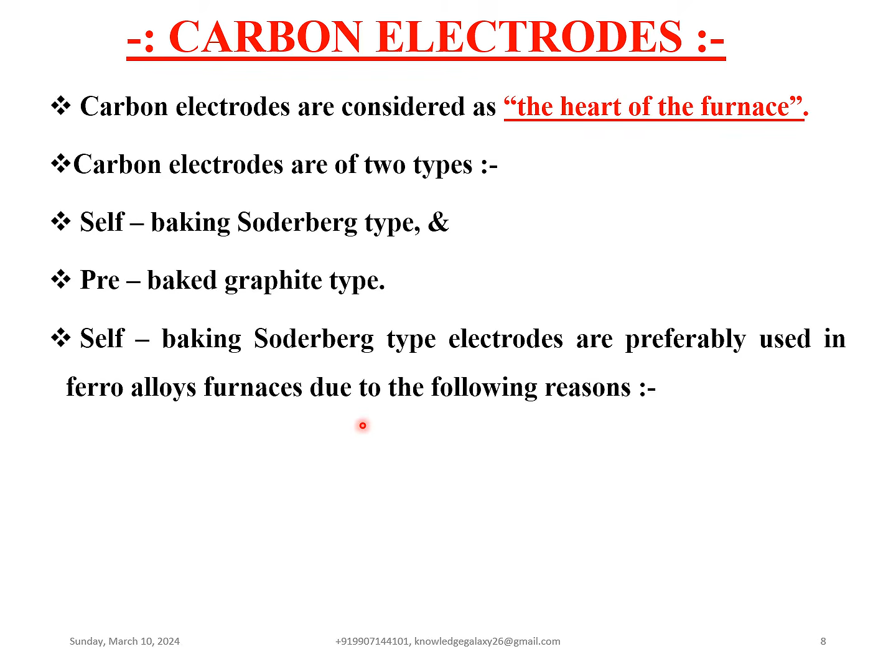Self-baking Soderberg type electrodes are preferably used in ferroalloys furnaces due to the following reasons. First, cost of production of self-baking Soderberg type electrodes is less as compared to pre-baked graphite type, because there is no need to consume time, energy and money for its manufacture. I hope you might have heard about this long ago and many times. But why the electrodes of Soderberg type are majorly used in ferroalloys production is the main question, the details of which I am going to describe in this presentation.

This presentation will clear all your doubts regarding carbon electrodes, its manufacture, its properties. So I will try to clear all your doubts with this presentation, and I hope this video will be very much helpful for you to know about the electrodes for submerged arc furnaces. Okay, let's proceed.

The electrode paste is fed in the mild steel casings in the size range of 25 to 75 mm briquettes or 50 kg cylinders. It gets baked by the heat of the process itself and forms the electrode, thereby eliminating the need for separate baking. This is why it is called self-baking Soderberg type electrode.

Operationally also, it is very convenient to use, since self-baking Soderberg type electrodes are continuously fed from the top based on the consumption, without any need to switch off the furnace for feeding the electrode paste in the mild steel casings. So all these reasons justify the use of self-baking Soderberg type electrodes in submerged arc furnaces. I hope it is clear to you all. Okay, now let's proceed.

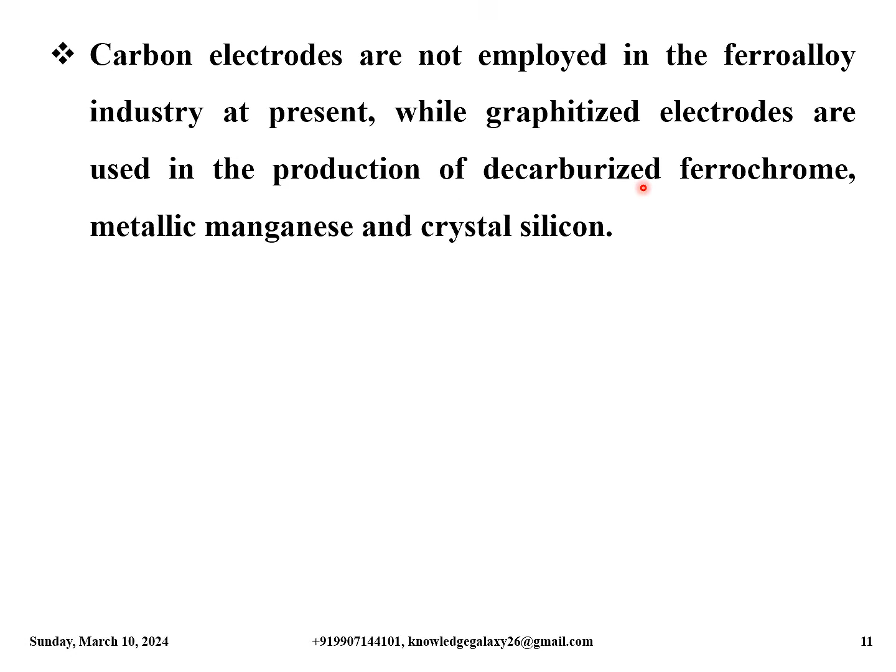Continuous self-baking electrodes, that is Soderberg electrodes, which have supplanted carbon electrodes wherever carburization of alloys or their dilution by iron is permissible, are widely used at present. Carbon electrodes are not employed in the ferroalloy industry at present, while graphitized electrodes are used in the production of decarburized ferrochrome, metallic manganese and crystal silicon.

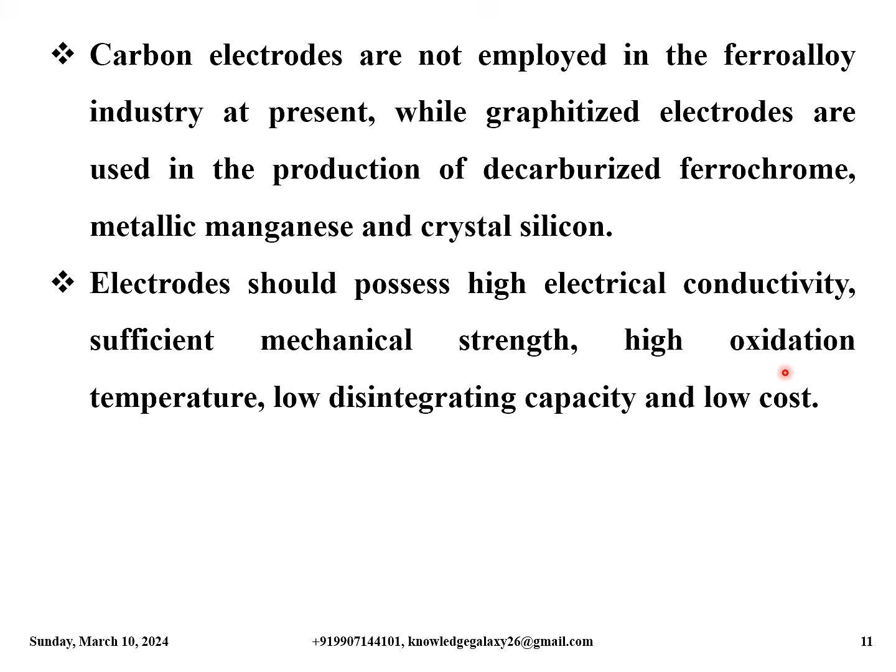Electrodes should possess high electrical conductivity, sufficient mechanical strength, high oxidation temperature, low disintegrating capacity and low cost. These are the major parameters to choose or major properties of a self-baking Soderberg type electrode. Round electrodes are generally used to ensure a reliable contact between the electrode and the clamp. The shape of the electrode should be geometrically perfect. Ferroalloy smelters normally use electrodes ranging from 250 to 1400 mm in diameter.

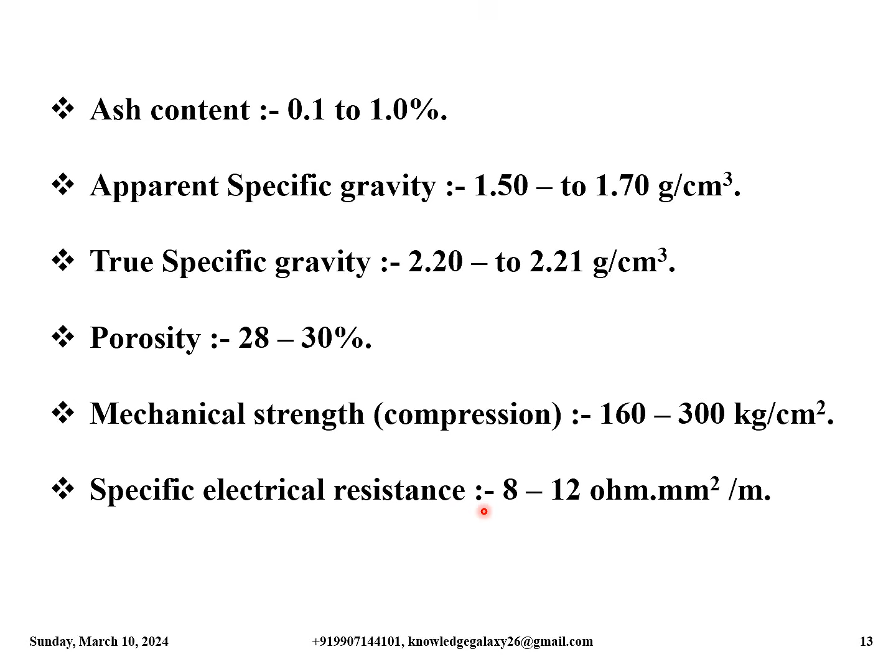The physico-chemical properties of graphitized electrodes are as follows. First, ash content 0.1 to 1.0%. Next, apparent specific gravity 1.50 to 1.70 gram per cubic centimeter. True specific gravity 2.20 to 2.21 gram per cubic centimeter. Porosity should be 28 to 30%. Mechanical strength in compression should be 160 to 300 kg per square centimeter. Specific electrical resistance should be 8 to 12 ohm millimeter square per meter.

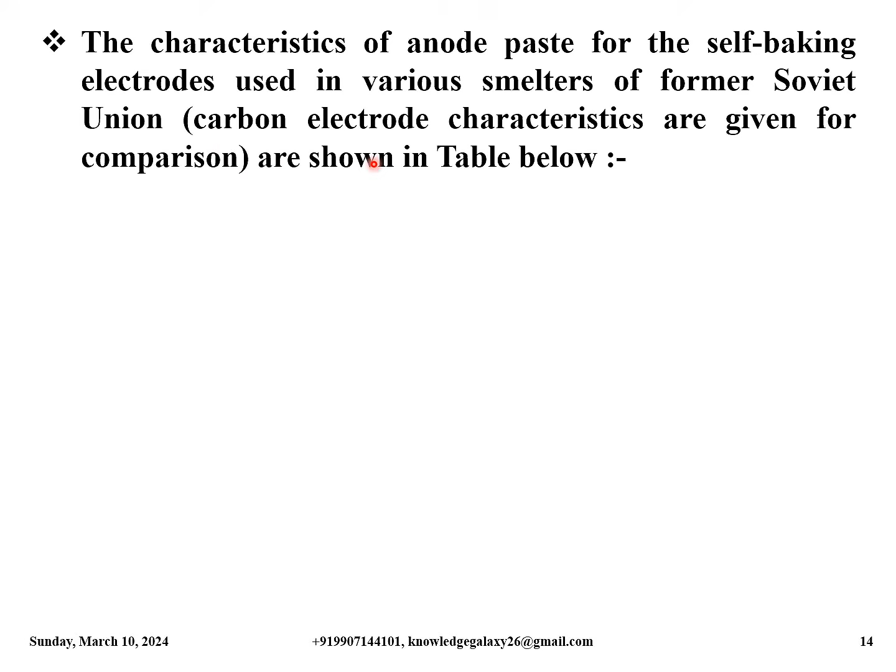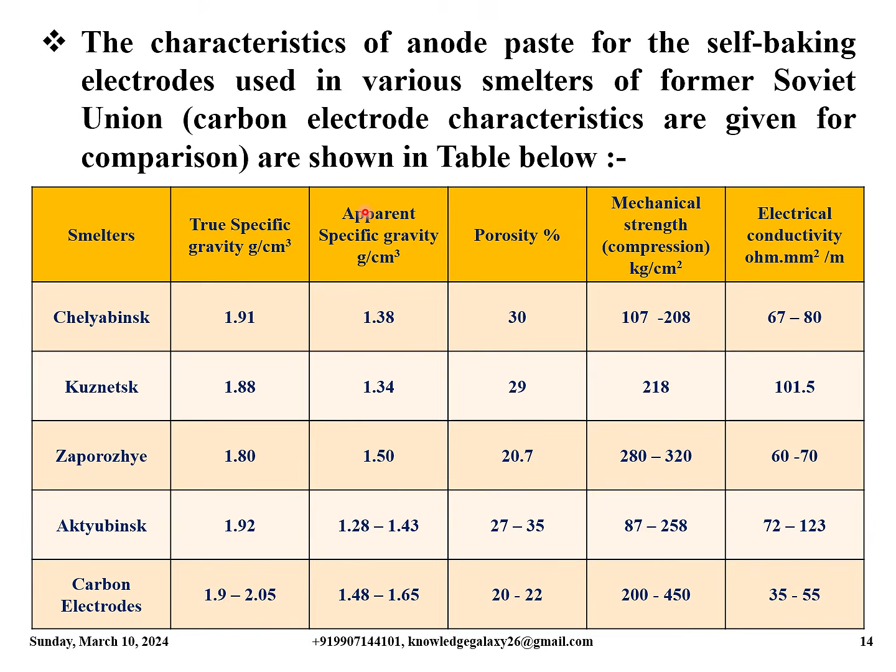The characteristics of anode paste for the self-baking electrodes used in various smelters of former Soviet Union are shown in the table below. Along with this, carbon electrode characteristics are also given for the comparison. My dear friends, I have populated this table so that it is very much useful for you all to understand the various properties about the electrode anode paste. You can pause the video and observe the table contents. Okay, let's proceed.

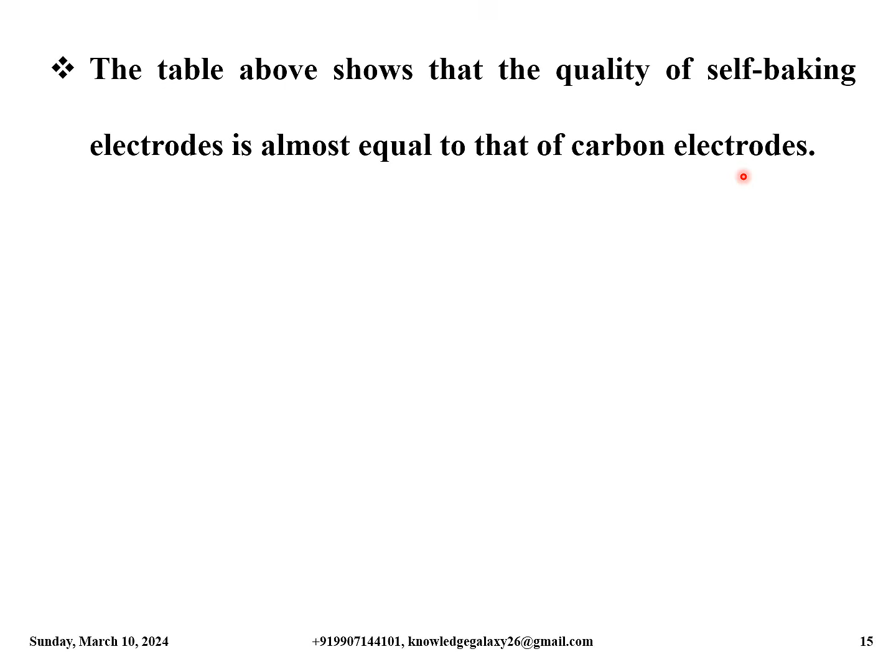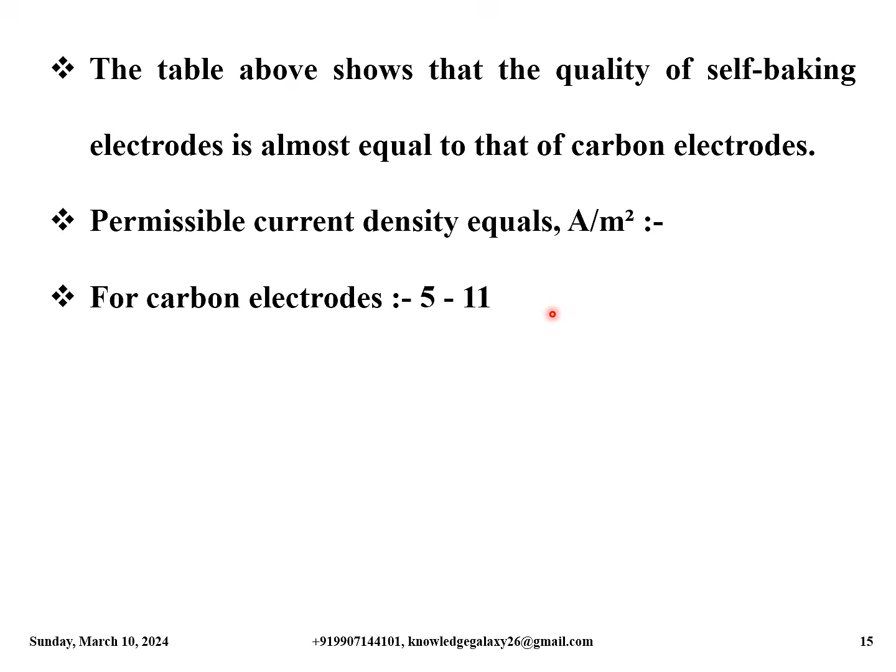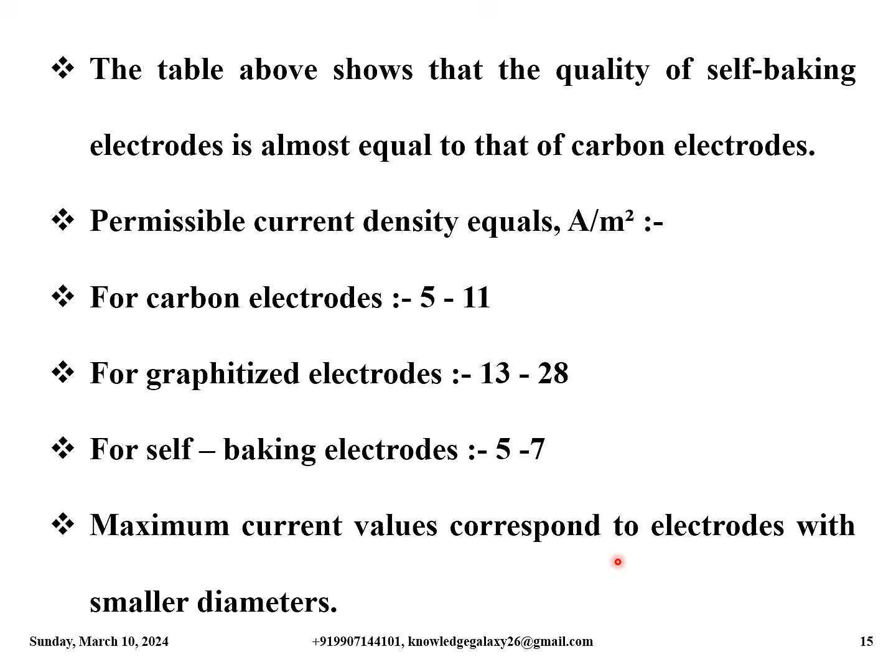The table above shows that the quality of self-baking electrodes is almost equal to that of carbon electrodes. Permissible current density, in amperes per square meter, for carbon electrodes is 5 to 11 amperes per square meter. For graphitized electrodes it is 13 to 28 amperes per square meter, and for self-baking electrodes it is 5 to 7 amperes per square meter. Maximum current values correspond to electrodes with smaller diameters.

So just keeping on. Electrode manufacture is characterized by numerous operations of considerable duration, which in the manufacture of graphitized electrodes take about 2 months. Carbonaceous materials used for the manufacture of electrodes, that is anthracite, coke, graphite and coal pitch, are stored in special, usually closed storerooms to prevent them from becoming damp and soiled.

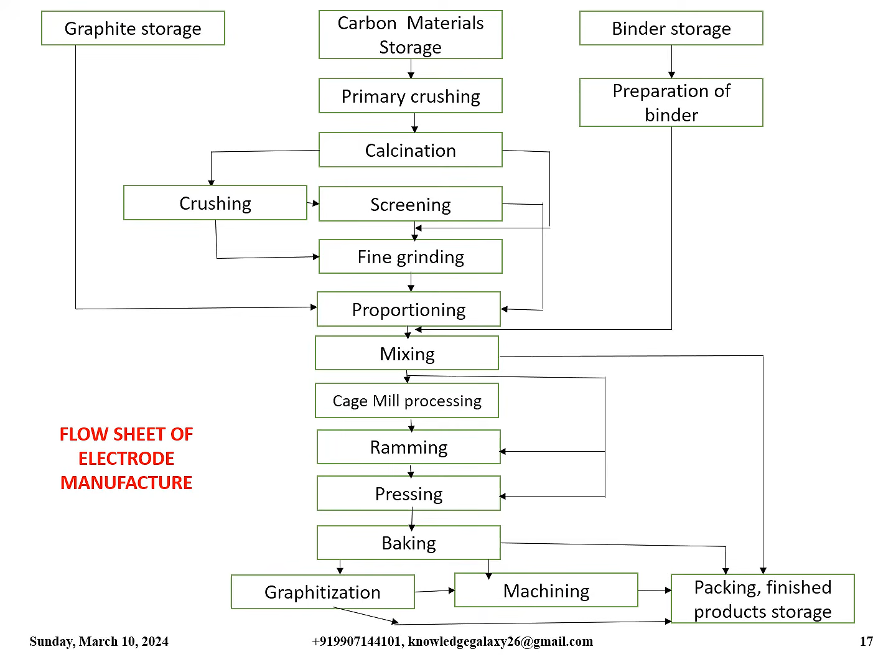My dear friends, I have made this flow sheet of electrode manufacture with too much effort, so I would request you all to please watch all the steps of this flow sheet of electrode manufacture very carefully. It will help you a lot. Okay, now let's proceed.

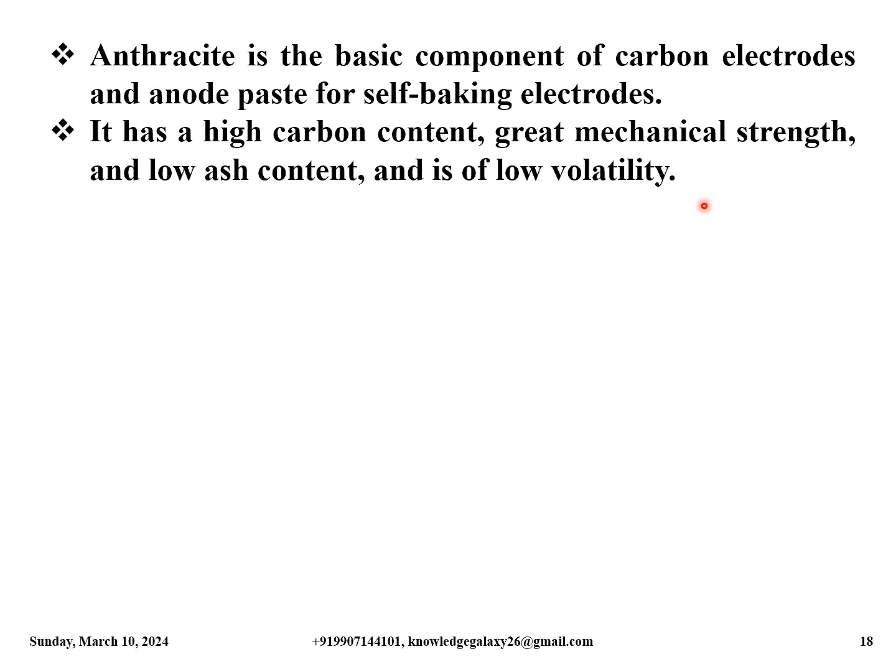Anthracite is the basic component of carbon electrodes and anode paste for self-baking electrodes. It has a high carbon content, great mechanical strength and low ash content and is of low volatility. Anthracite which has gone through thermal treatment in special furnaces is called thermoanthracite. The use of thermoanthracite in electrode manufacturing works makes it possible to substitute drying for calcination.

Anthracite is considered suitable for the manufacture of thermoanthracite, that is electrode and foundry grade, when it is strong and thermally stable, possesses high specific gravity, dense homogeneous structure, fine-grained fractures and is free of lamellar pieces and noticeable cleavage.

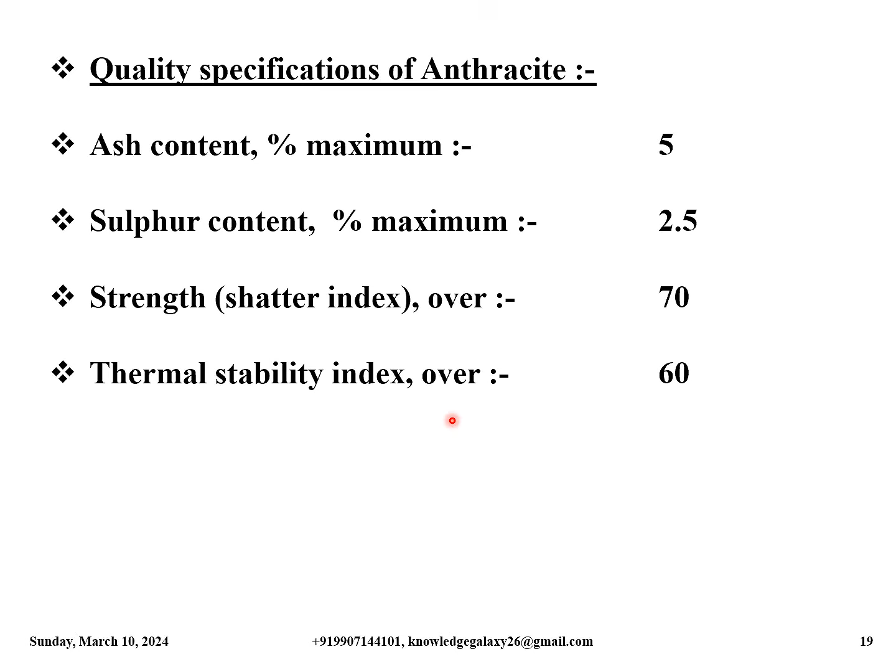Now let us discuss about the quality specifications of anthracite, which is used for the manufacture of anode paste. First, ash content, the maximum value should be 5%. Sulfur content maximum should be 2.5%. Strength, that is shatter index, should be over 70. Thermal stability index should be over 60. Specific gravity should be over 1.5. And size of lumps should be in the range of 50 to 120 mm. Fines, that is lumps of less than 50 mm, should be 5% or below.

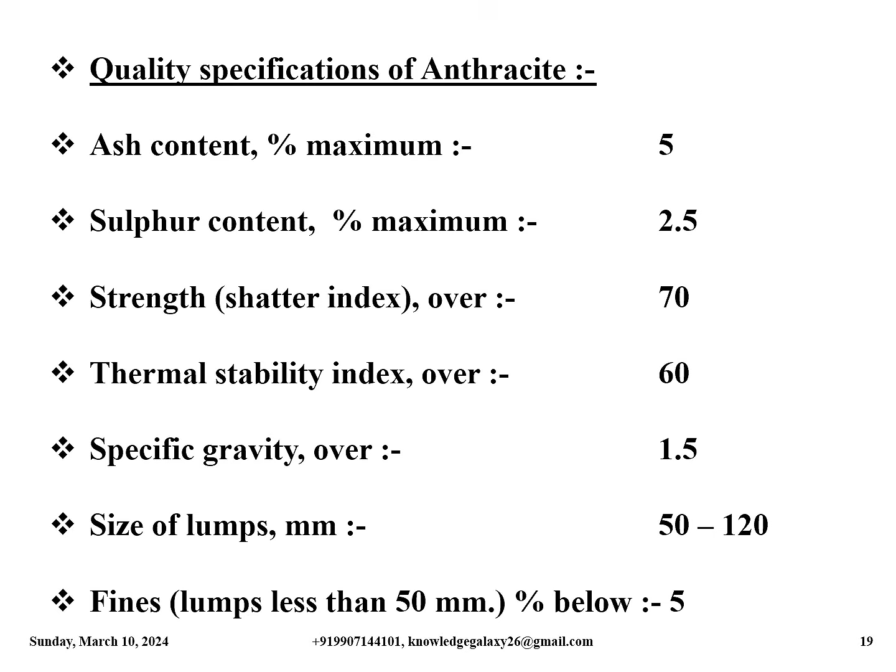Anthracite should not contain lumps of pyrite or barren rock. The quality specifications for the electrode thermoanthracites are as follows. First, moisture, the mean value should be 0.2%. Ash content, the maximum should be 5.0%.

Sulfur content, maximum should be 1.9%. Volatile matters content, maximum should be 0.3%. Lumps larger than 40 mm, that is Trommel test, should be minimum 70%. Specific electrical resistance, that is ohm square millimeter per meter, should be below 1.000.

Size of lumps in mm should be 25 to 100 mm. Fines content, lumps of less than 25 mm should be 5% or below.

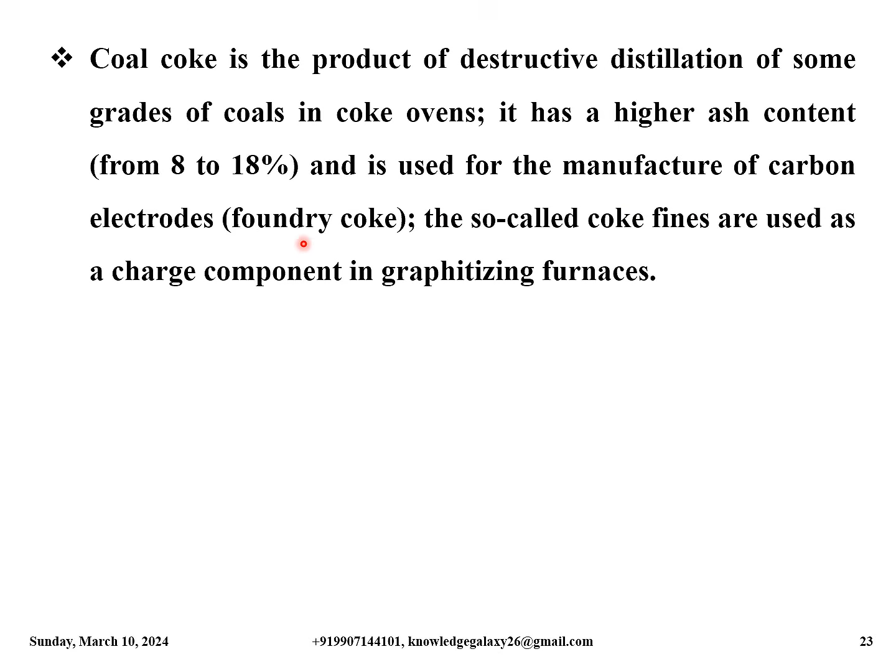Pitch coke is obtained by carbonizing coal pitch. Pitch and petroleum coke are distinguished by a low ash content below 1% and low volatile matter content. Coal coke is the product of destructive distillation of some grades of coals in coke ovens. It has a higher ash content, that is in the range of 8 to 18%, and is used for the manufacture of carbon electrodes, that is foundry coke. The so-called coke fines are used as a charge component in graphitizing furnaces.

Graphite, when added to the anode paste, enhances its plasticity, making pressing easier, thus permitting denser products to be obtained, and increases electrical conduction, thermal conductivity, and heat resistance. Ash in graphite should not exceed 10%. Coke characteristics are given in the table below.

Coal pitch is a solid, lustrous black in color. Its specific gravity ranges from 1.245 to 1.299. Coal pitch is used as a binder. Pitch is sometimes stocked in liquid form in specially heated hoppers called pitch conditioners. Another type of binder, that is coal tar, is stored in underground heated reservoirs in the binder store yards. This viscous liquid is a byproduct of coke.

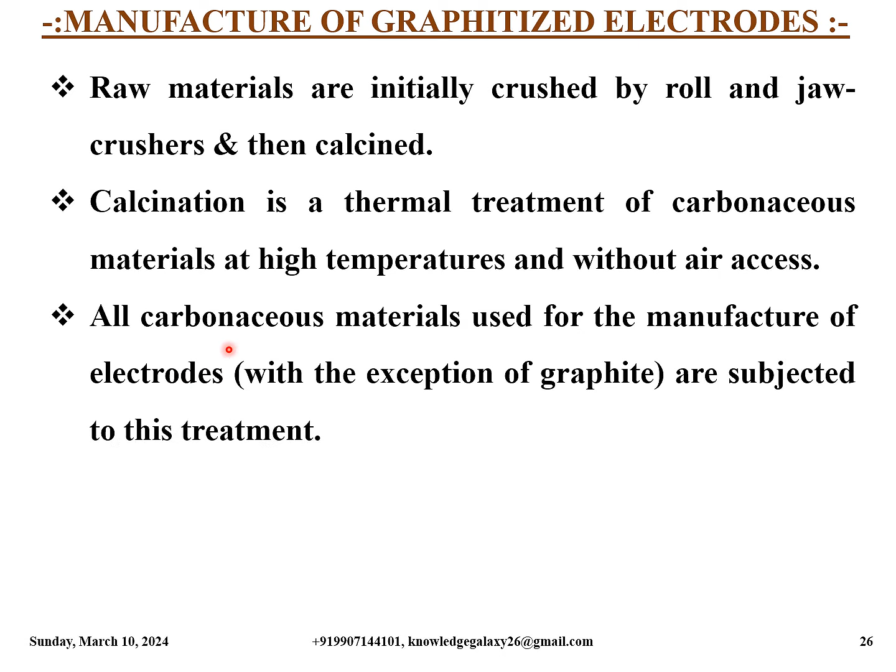Now let us consider the manufacture of graphitized electrodes. Raw materials are initially crushed by roll and jaw crushers, which are shown in the next slides, and then they are calcined. Calcination is a thermal treatment of carbonaceous materials at high temperatures and without air access. All carbonaceous materials used for the manufacture of electrodes, with the exception of graphite, are subjected to this treatment. This operation increases apparent and true specific gravities, electrical conductivity, and mechanical strength, and reduces the volatile matter content.

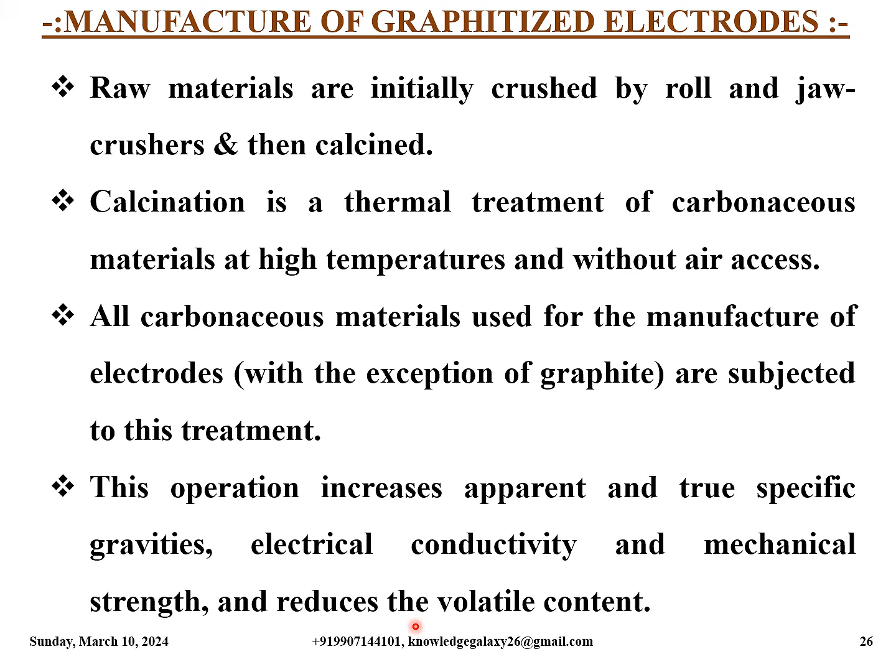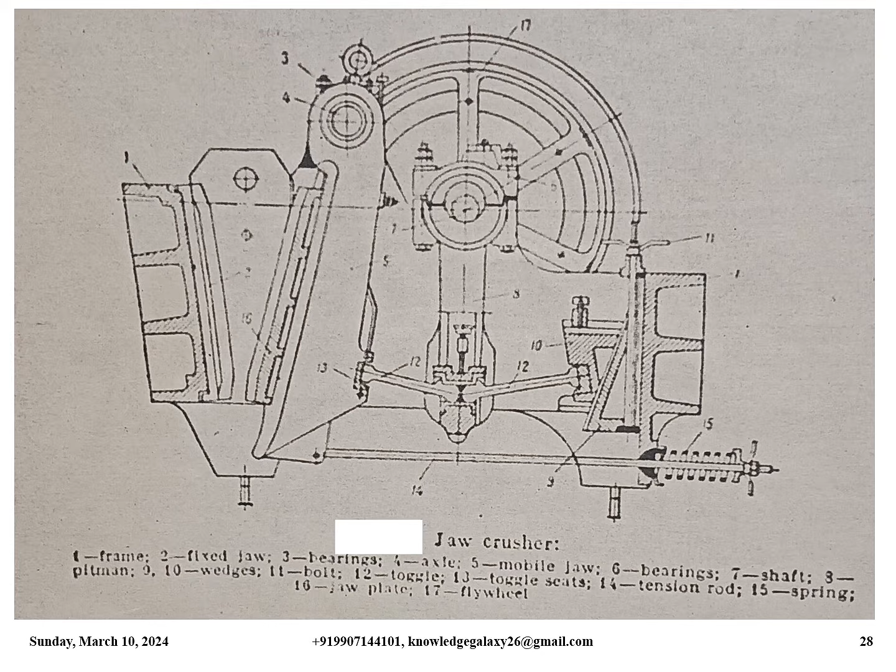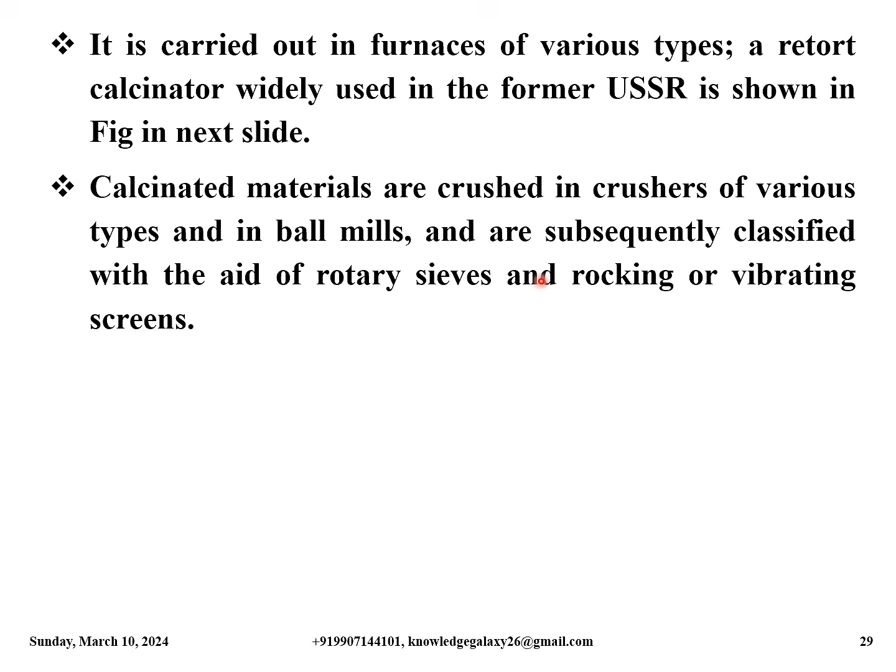Now, it is carried out in furnaces of various types. A retort calcinator widely used in the former USSR is shown in the figure in the next slide. Calcinated materials are crushed in crushers of various types and in ball mills, and are subsequently classified with the aid of rotary sieves and rocking or vibrating screens.

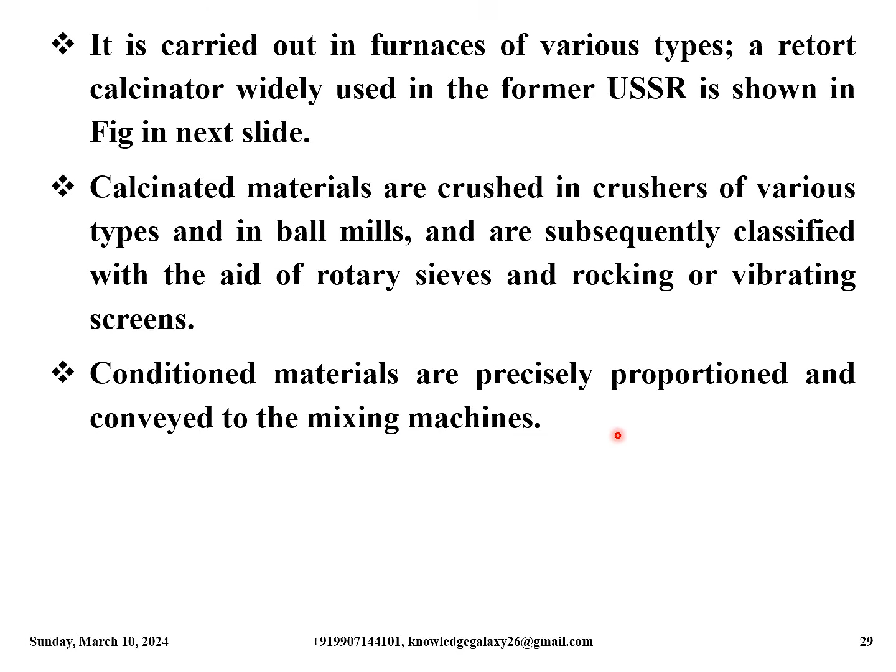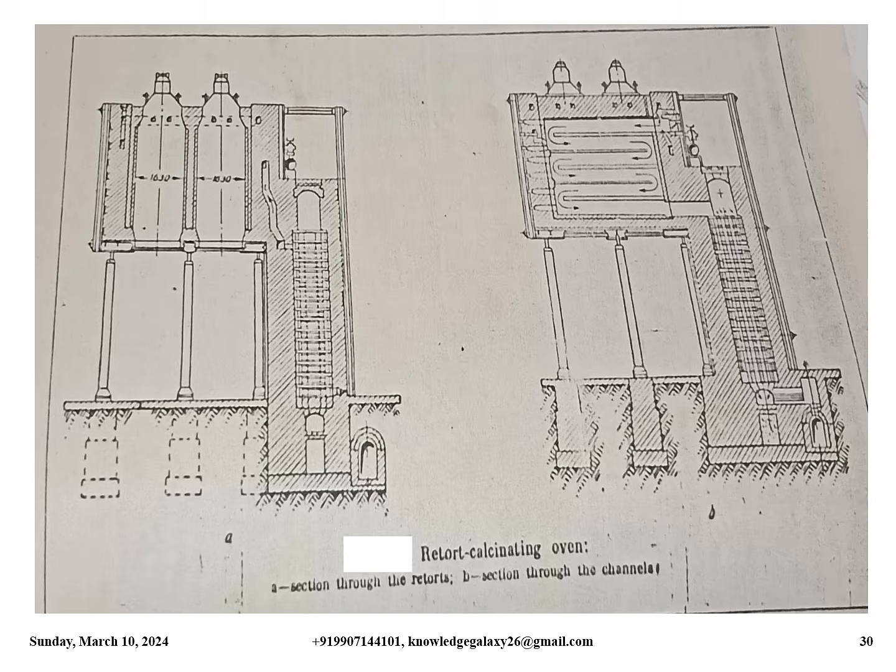Conditioned materials are precisely proportioned and conveyed to the mixing machines. A homogeneous mixture called electrode or anode paste is obtained in these machines. It goes either for the subsequent manufacture of electrodes or is considered to be a finished product. So this is the picture of the retort-calcinating oven used in the former USSR, and different sections are also mentioned in that.

The paste meant for the manufacture of electrodes is conveyed to a large mixing machine which acts as a conditioner and in which the temperature of the paste is leveled out. Anode paste products are obtained with the aid of hydraulic presses by two methods. First, pressing with closed impression dies, and second, extrusion of the paste through a nozzle, the broaching method. Preliminary pressing is usually done directly in the press container, which increases the compactness of the electrodes and levels out the pressure in the operation.

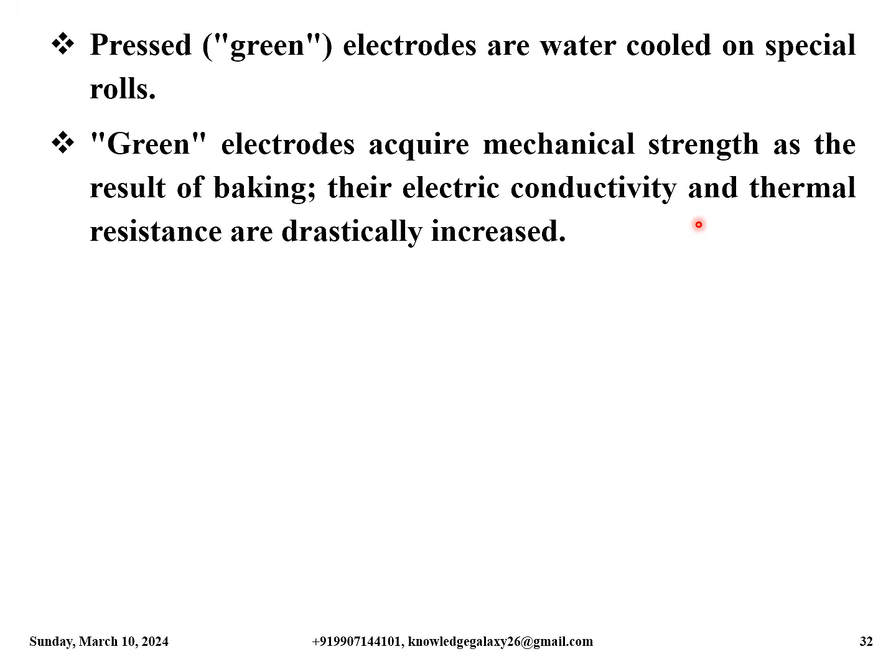Pressed, that is green electrodes, are water cooled on special rolls. Green electrodes acquire mechanical strength as the result of baking. Their electric conductivity and thermal resistance are drastically increased. Baking is effected at 1200 degrees Celsius in neutral atmosphere, which preserves the electrodes from being burned and deformed. Coke fines are used as a filling.

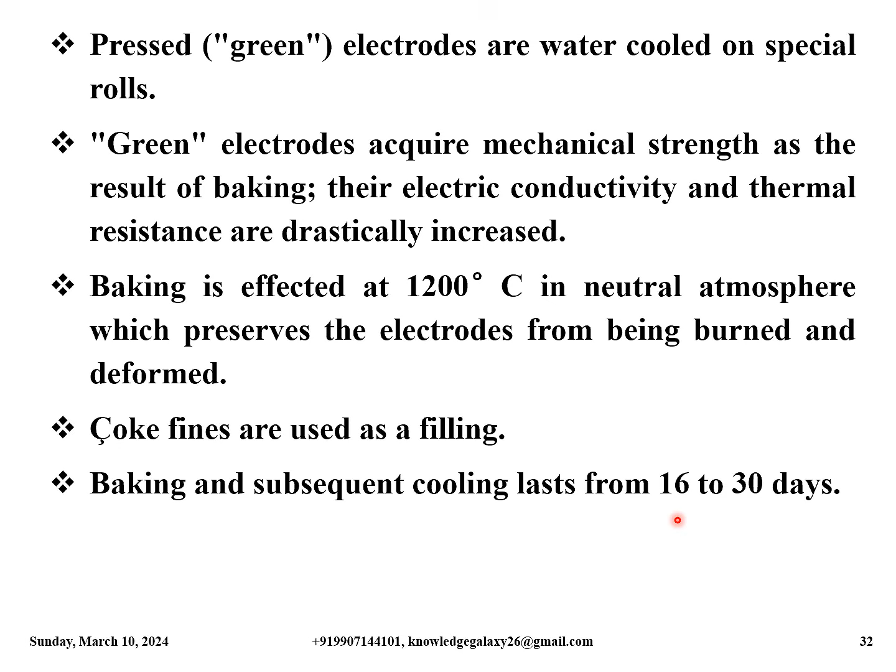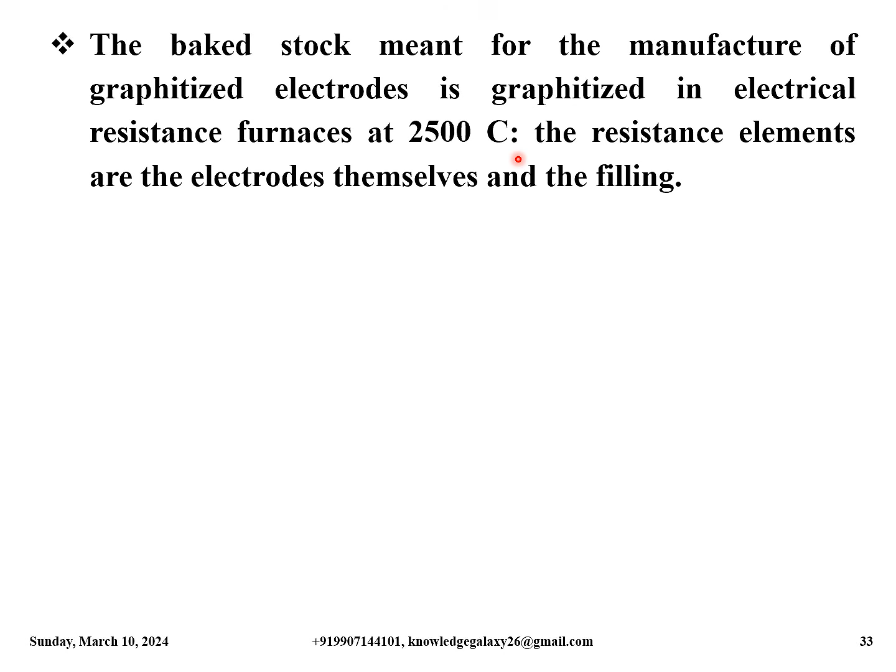Baking and subsequent cooling lasts from 16 to 30 days. As you can see, this is a very time-consuming process step, so it requires a lot of effort. During this period, the binding materials are cooked and the electrodes acquire the properties mentioned above. The baked stock meant for the manufacture of graphitized electrodes is graphitized in electrical resistance furnaces at 2500 degrees Celsius. The resistance elements are the electrodes themselves and the filling.

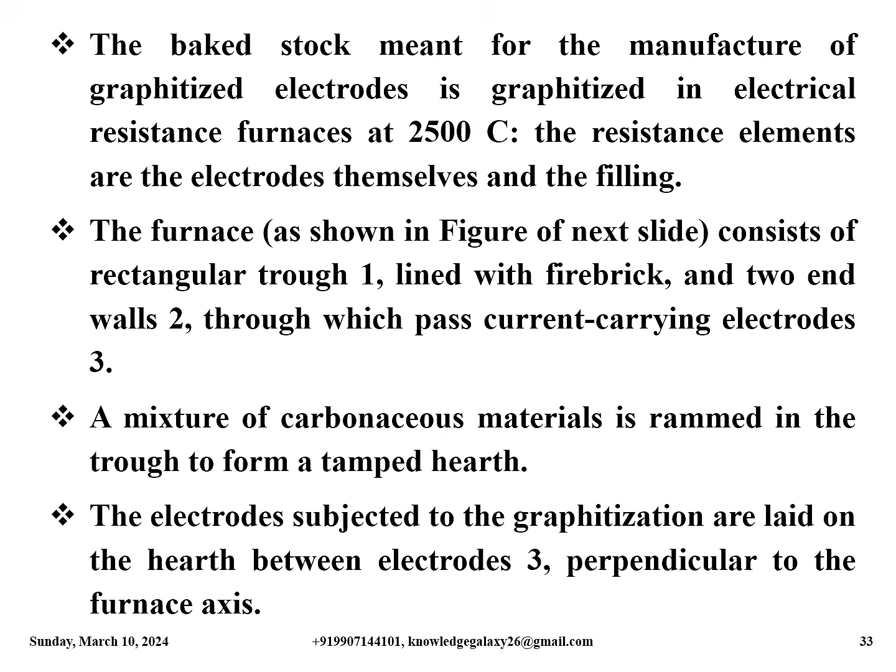One side wall is made of firebrick while the other is of concrete blocks. The space between the electrode charge and the side walls is filled with heat insulating material. A layer of insulating material also covers the electrodes. As the result of graphitization, the products acquire valuable graphite properties: sharp increase in electrical conductivity, heat conductivity and chemical stability, and diminution of hardness. The electrodes are readily machined, this ensuring the accuracy of nipple joints.

An additional operation, that is soaking, is effected to improve the physico-chemical properties of graphitized nipples and to increase their compactness and toughness. Baked stock is soaked with pitch in autoclaves at 200 to 300 degrees Celsius and 5 kg per square centimeter pressure for several hours depending on the cross-section area of the semi-product. After that, the latter is graphitized.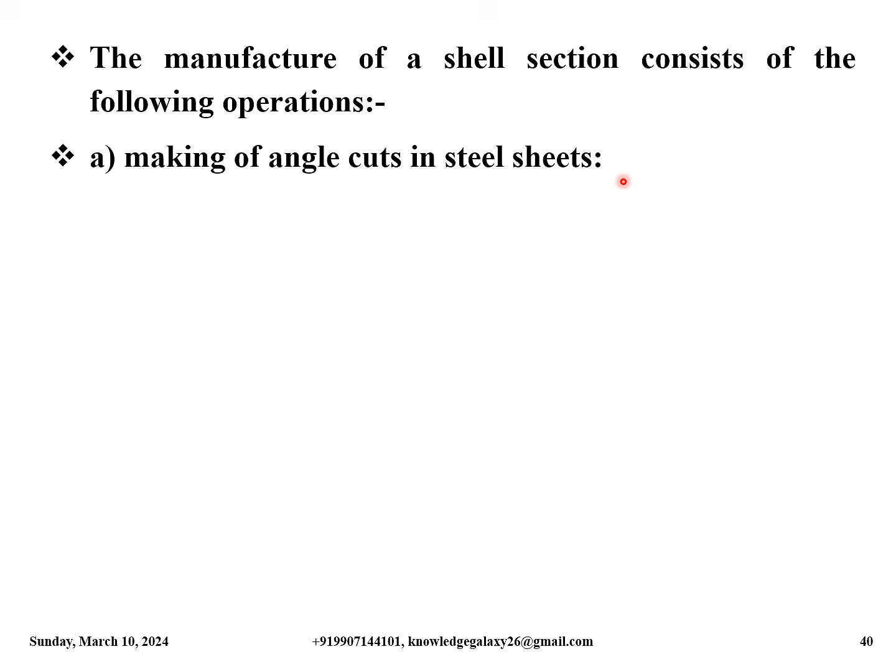The manufacture of a shell section consists of the following operations. Making of angle cuts in steel sheets, this is the first operation. Second, rolling of sheets along the cylinder generatrix, bending of sheet edges inside along the cylinder radius and bending of

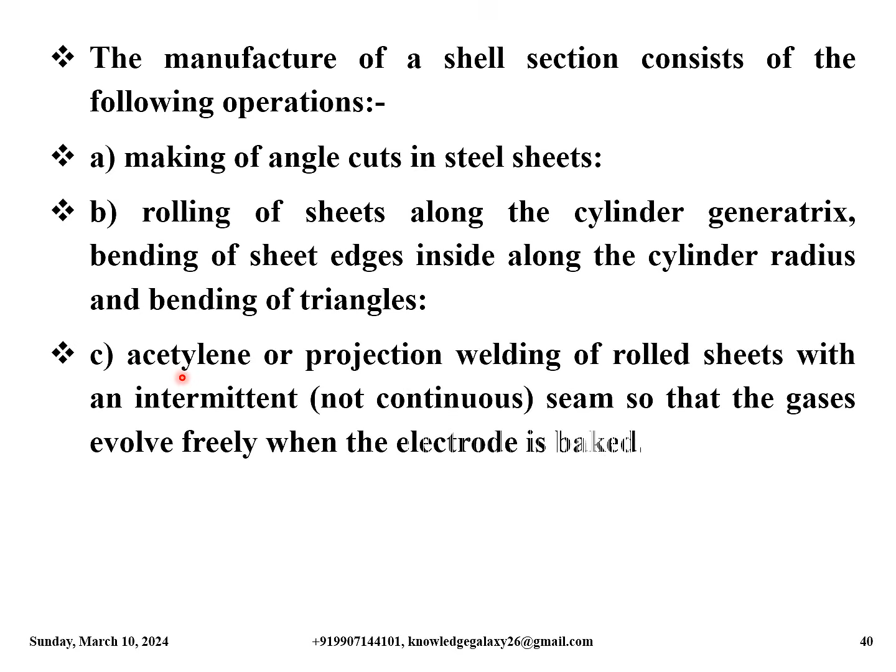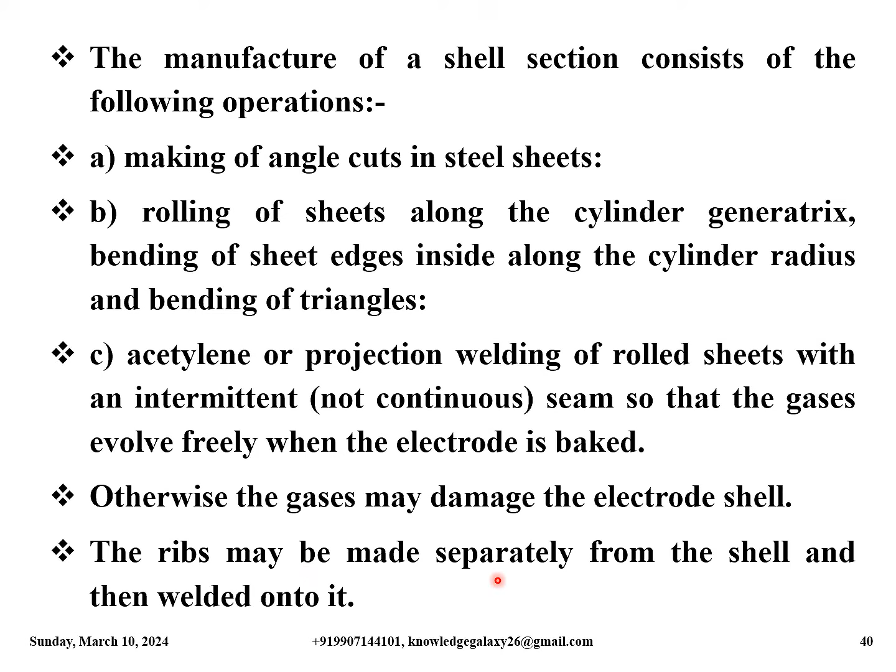triangles. Third step is acetylene or projection welding of rolled sheets with an intermittent, that is not continuous, seam so that the gases evolve freely when the electrode is baked. Otherwise, the gases may damage the electrode shell. The ribs may be made separately from the shell and then welded onto it.

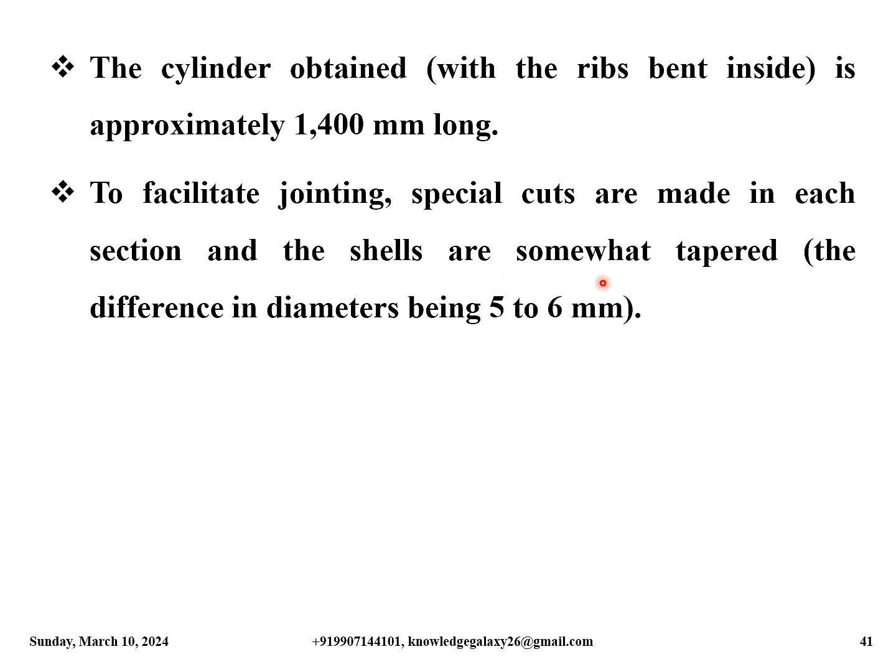The cylinder obtained with the ribs bent inside is approximately 1400 mm long. To facilitate jointing, special cuts are made in each section and the shells are somewhat tapered, that is the difference in diameters being 5 to 6 mm only.

Inner ribs are intended to increase contact surface between the shell and the anode paste to provide adequate adhesion and to make the electrical conductivity and mechanical strength of the electrode more reliable. The number of ribs ranges from 4 to 8 depending on the electrode diameter. The rib height is increased correspondingly from 100 to 250 mm.

There are not less than 4 triangles bent on each rib, the so-called tongs. These tongs strengthen adhesion between the shell and the anode paste. The shell itself is a casing for the anode paste.

It protects the anode paste against oxidation, provides passage for the electric current from the electrode arm to the baked section of the electrode and intensifies heat transfer to the upper unbaked section of the electrode.

Electrode paste is prepared in accordance with the above mentioned technological flow sheet in electrode manufacturing works or in special shops at the ferroalloy smelters. The various manufacturing methods give the following ratio of electrode paste consumption in percentage.

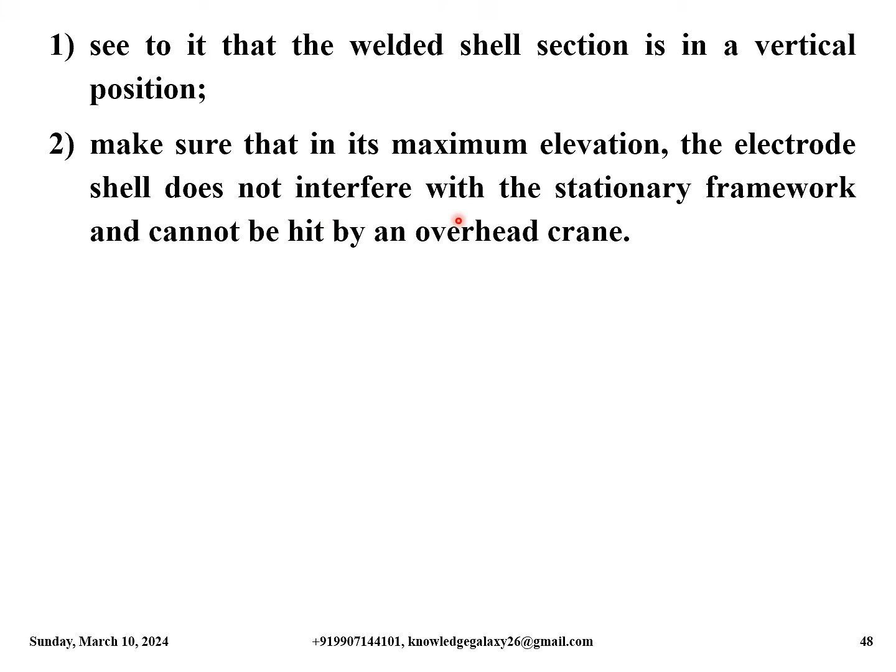In welding shells, one must observe the following conditions. First, see to it that the welded shell section is in a vertical position. Make sure that in its maximum elevation, the electrode shell does not interfere with the stationary framework and cannot be hit by an overhead crane.

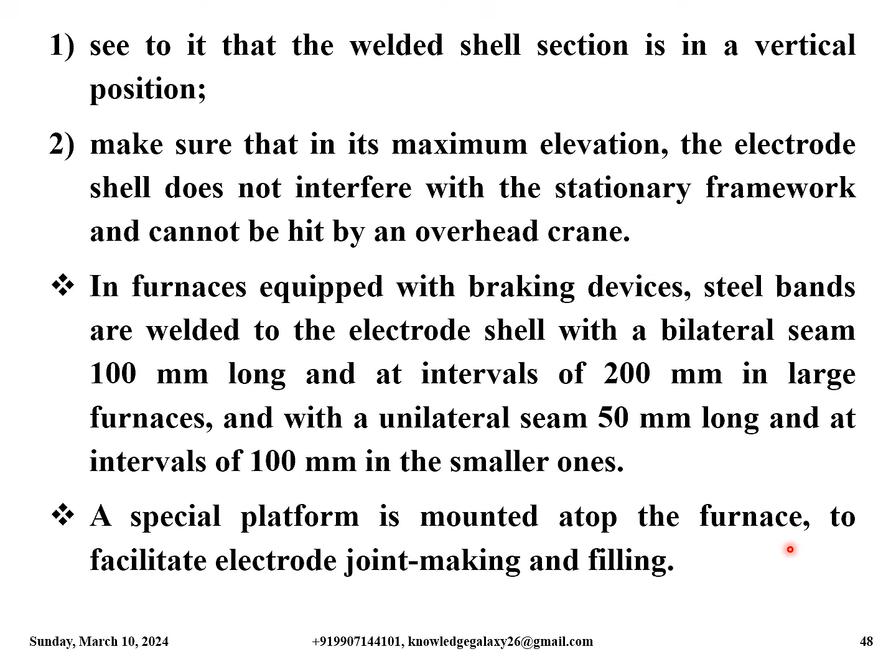In furnaces equipped with braking devices, steel bands are welded to the electrode shell with a bilateral seam 100 mm long and at intervals of 200 mm in large furnaces, and with a unilateral seam 50 mm long and at intervals of 100 mm in the smaller ones. A special platform is mounted atop the furnace to facilitate electrode joint making and filling.

The heat evolving from the furnace softens the paste and enables it to fill the electrode shell compactly. Temperature for the baking of electrodes should be as follows: 25 degrees Celsius when the paste is solid. Next, 70 degrees Celsius when the paste is completely softened and melts into a solid block. Next, 300 degrees Celsius when the solidification sets in. 700 degrees Celsius when the solidification ends with the evolution of remaining volatile matters.

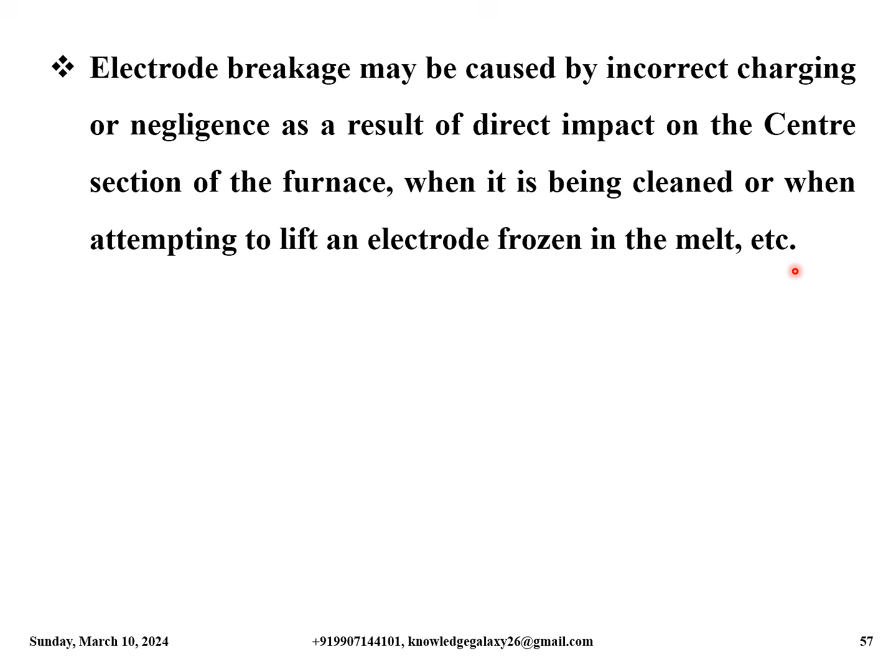In normal operating conditions, the slipping of self-baking electrodes is effected with baked electrodes, thus ensuring reliable clamp-electrode contact. When baking the electrode above the clamps, it should be slipped so as to provide contact with the unbaked electrode. Slipping of self-baking electrodes with the power on was described above. It should be noted that the use of a spring lock in electrode holders permits slipping electrodes without disconnecting the power supply. Electrodes are slipped 100 mm each shift, and this depends on the product, the company and the size of the furnace. It totally depends on the consumption of the electrodes.

This increases furnace efficiency. Moreover, spring clamps ensure uniform clamp pressure, thus improving operating conditions as a result of identical contact between the clamp and the electrode for all clamps. My dear friends, nowadays hydraulic presses are used for the electrode holder supply, electrode holder contact clamps. So nowadays technology has improved and hydraulic machines are used for all the electrode holding devices, contact clamps, etc.

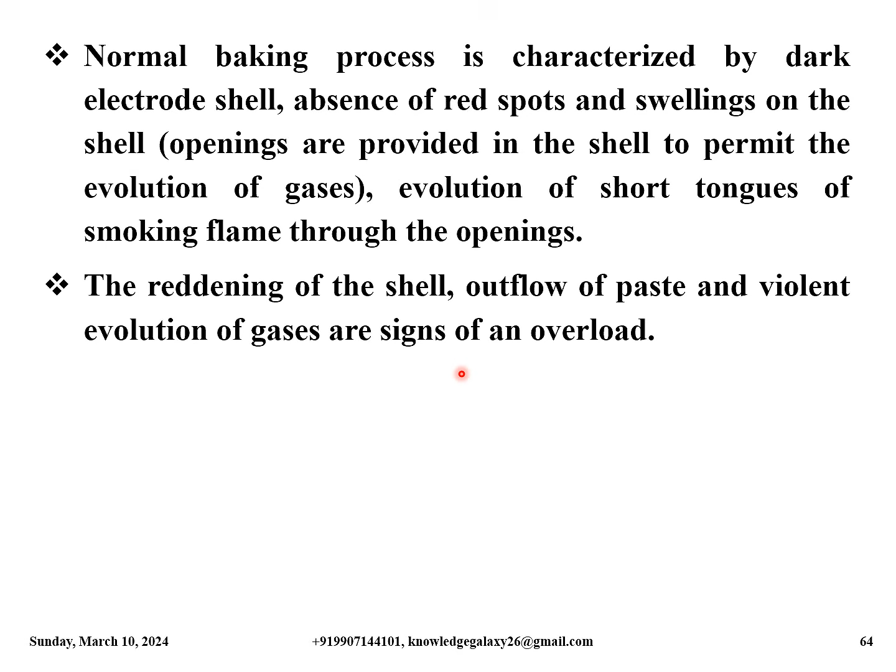Normal baking process is characterized by dark electrode shell, absence of red spots and swellings on the shell, that is, openings are provided in the shell to permit the evolution of gases, evolution of short tongues of smoking flame through the openings. The reddening of the shell, outflow of paste and violent evolution of gases are signs of an overload. In this case, power input should be decreased immediately. The disappearance of flames shows that the baking process is over.